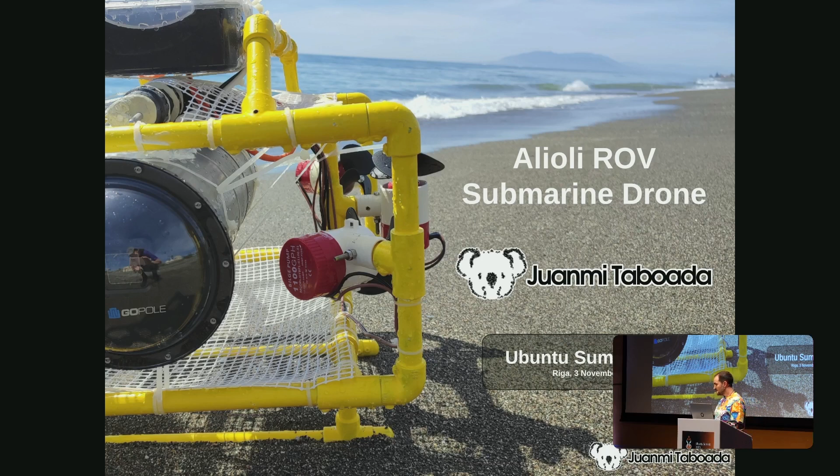This is the main thing that brought me to make the submarine. I am a scuba diver. I actually have the license for deep diving, 40 meters. What moves me to make this project is the passion for water, to be able to share what I like so much about what's going on under the water, with people that I love and my friends.

There are people that can enter the water, but there are others that cannot, because of conditions or whatever. The first thing that happens when you get to the water the first time is that you don't know anything about it. You've been swimming on the surface, but you don't know what's going on underneath - it's a totally different thing.

The first feeling when you start breathing underwater is like you can stay there as long as you want, but usually not longer than 45 minutes, up to 90 minutes, maybe 2 hours. That shocked me in the beginning, because it takes so long to prepare everything - the equipment, the course, the knowledge - just for 45 or 90 minutes. So you have to make that time worth it.

When you go to dive the first time, you need a license, and there are several licenses. The most common is PADI certification - the open water diver is the first certification, and it gives you access to the first 18 meters. With a bottle you rent, you can get under the water down to 18 meters, covered by your insurance, because if you do it by yourself, everything that happens will be on you. Then there's advanced diver at 30 meters, and finally deep diver.

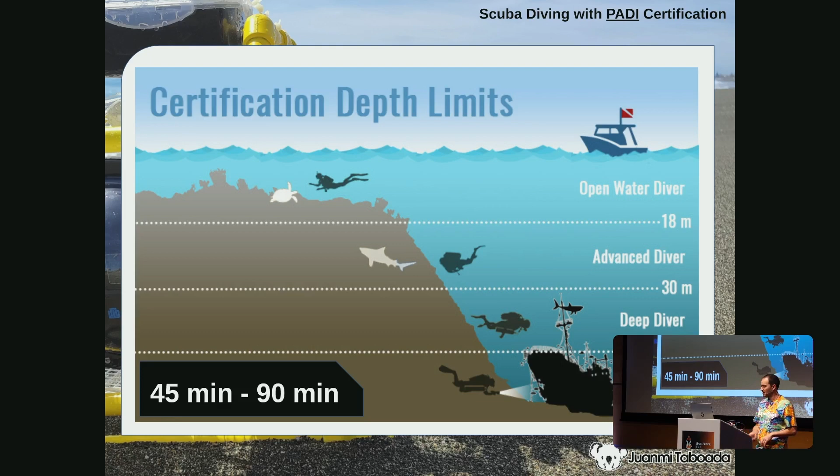If you make your own one, you can avoid all the preparation you'd need. You just take your submarine, like a drone that flies - you plug everything in, connect it to the computer, put it in the water, and it's done. If something happens, it happens to the drone, not to you. You just pull it back and repair whatever happens.

So to make that time worth it, you better make a plan. It's like going somewhere - what you see on the surface of the water is just a reflection of the sky, everything blue on top. But underwater it's like being on a mountain, with rocks, hills, and caves. So when you go underwater, you have to know what you're going to see, because you can face the problem of getting disoriented.

You lose orientation very quickly - you don't get used to it. We learn to get oriented underwater, but on the first dives, especially when diving somewhere for the first time, I need somebody to instruct me about that place, how the geography is going to be underwater.

Another thing that makes a plan important is that you have to predict your air. You have air in the bottle, and that has to last until you're out - actually you always have to live with a reserve. So to manage that air, you have to make a good plan. If you go too deep, you consume that air very quickly.

You have to be prepared for that. Maybe you go too deep, and when you're coming back, you have to stop. You cannot just go straight out of the water. You have to stay at some depth, until 5 meters, 3 meters, and wait 2 minutes before leaving. It's a very short distance, but the difference of pressure is quite big.

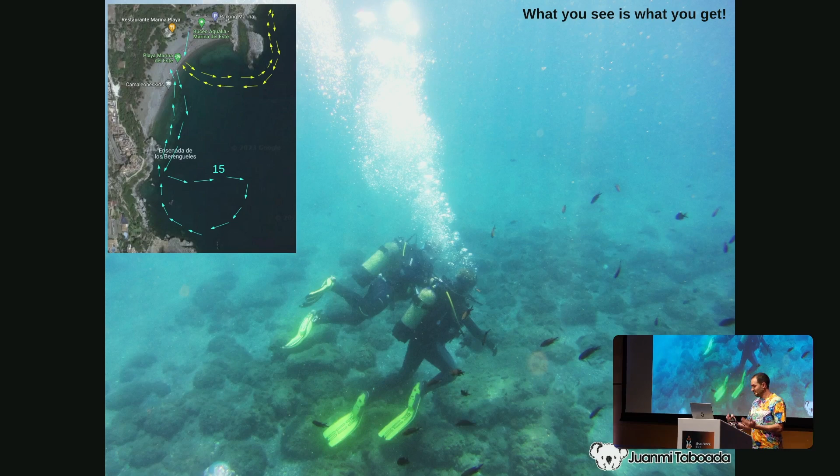So somebody has to tell you about it. Sometimes it's just blue, everything blue. You might be at 15 meters, with another 15 meters down or up, and you don't see any reference. So you only have your compass and the depth of that dive in that moment.

Another thing that I needed for building my own submarine is to have passion for computers and open source. This is actually a cluster based on OpenMosix, which was open source in 2001 when I was studying at university. That was one of my first projects, making a computational cluster based on OpenMosix. One developer of OpenMosix is from Málaga, so I could talk with him about it. That was what sparked my knowledge and my need for learning about open source and everything.

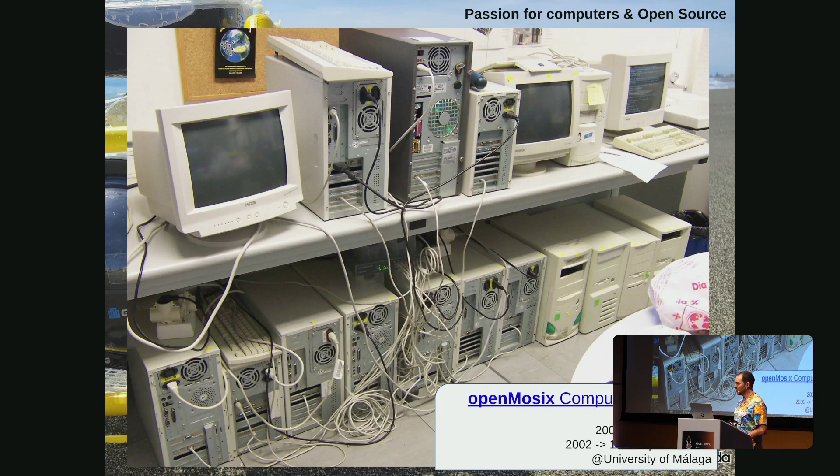Another thing you need for making a submarine is passion for researching and learning. It's not enough to start building with the knowledge that you have. You will have to research, read, ask, go to forums, and sometimes you just have to keep pushing and working, thinking about why something doesn't work. I remember one specific moment in the project that almost made me drop it because nobody could help me. So you have to be open to that researching, and especially to learning.

So this is what is going on now. What is the main concept of the project I'm working on? My main idea is to build a 3D map of the underwater areas near the coast. I'm not interested in going deeper or farther from the coast - the reason is because it's for scuba divers. A scuba diver who wants to dive in some place should be able to get a map with enough information and detail to know what's going on, where that person can go or dive, and what they will find.

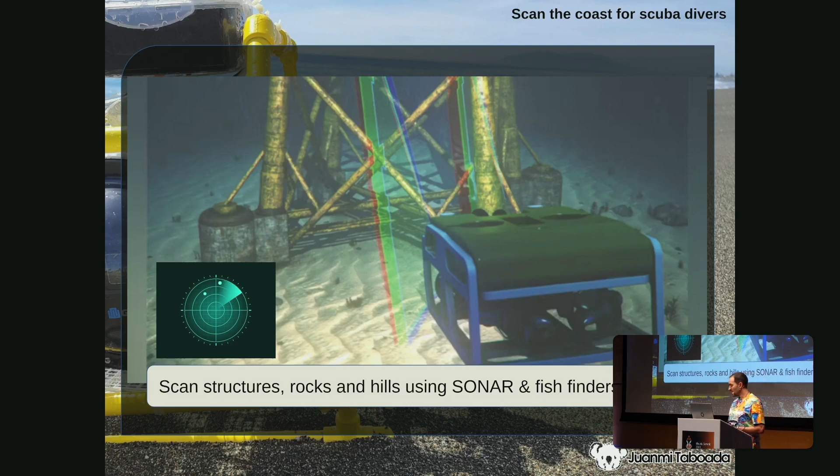My first approach was to find something that could scan structures, rocks, and hills. I thought, okay, it could be a sonar. Then I saw that sonar needs a lot of energy, so I decided to go with fish finders. Fish finders are quite a good solution, but they gave me results like this - a cloud of points that you then have to merge, and you don't even have the texture of the sea. So it was very difficult to process, and it needed a big amount of electricity.

So it didn't meet one of my approaches, which was that I wanted something that didn't consume much. I was trying to work with microcontrollers only, no computers, without putting electricity in from outside - only working with batteries.

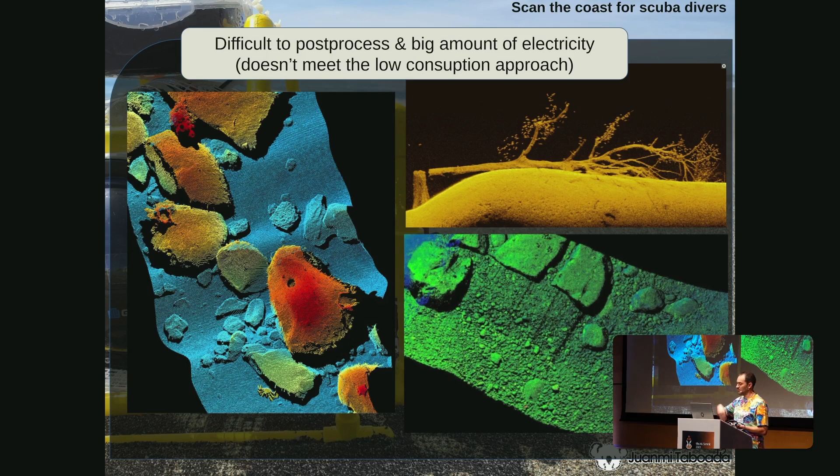So I found Meshroom. Meshroom is a framework, a software for 3D reconstruction based on photos. You take enough photos of something, and it will help you rebuild a 3D model of the object you are scanning. That was a good idea for me because I didn't need much to make my project work - I just needed a camera recording the dive and my ROV doing the paths. So Meshroom was a great decision.

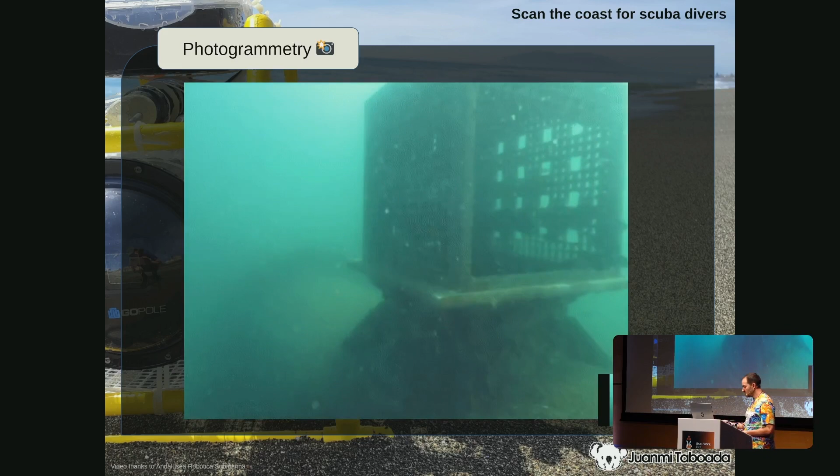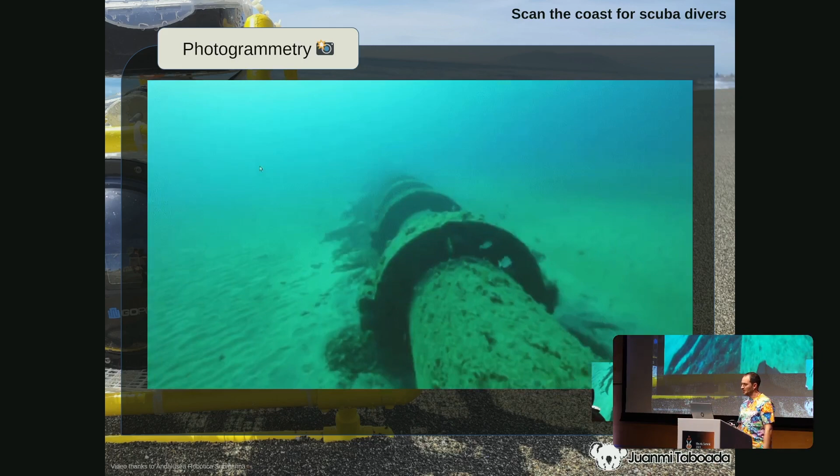This is another video, also from him. This is a pipe where residual water, after being processed, is pushed to the sea. So here we are scanning the pipe, to see if it's broken or leaking. For example, you can see that along the sides there are algae.

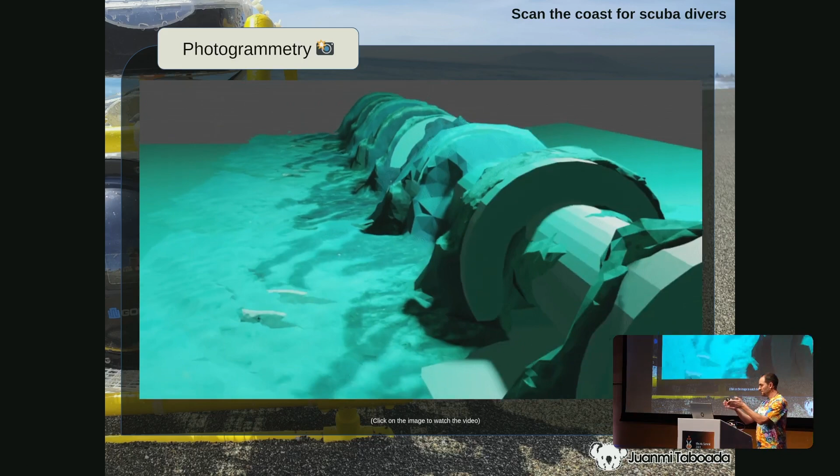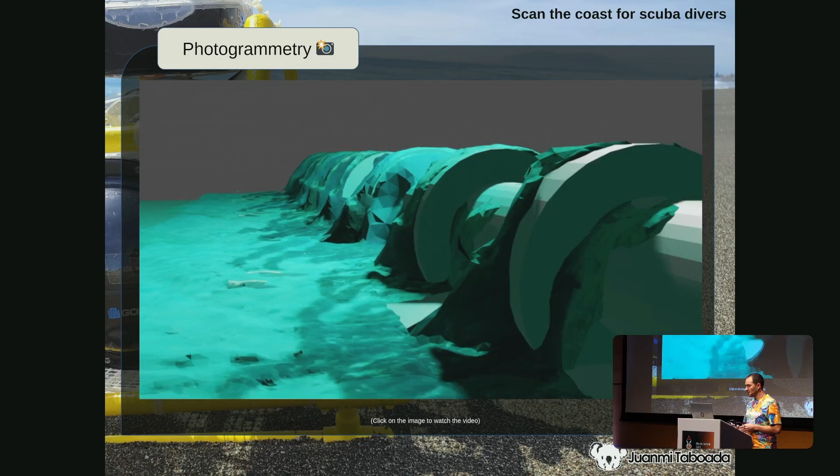So based on the video and using Meshroom, I got to this. This is a reconstruction that I made myself. You can see the algae on the sides as well, and there's a little bit of texture. I had to add a bit of my own reconstruction to keep the proportions and the shape, but it gives an idea of how it works.

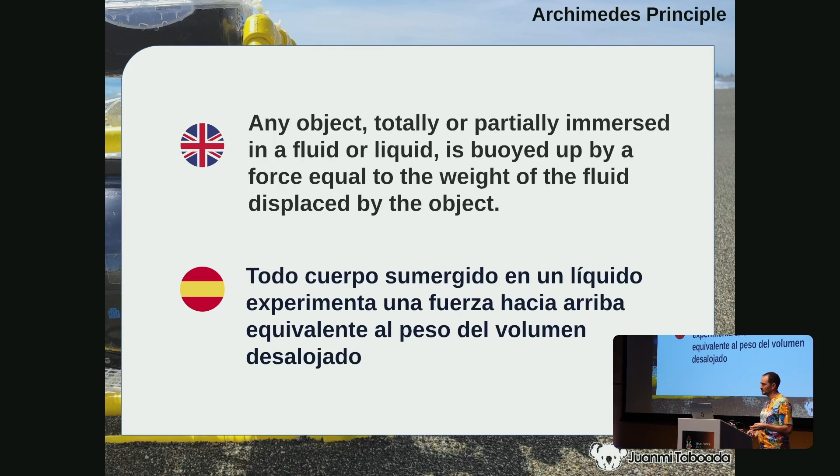Okay, let's talk a little bit of theory. First thing you need to know when underwater is the Archimedes law. The Archimedes law says that any object totally or partially immersed in a fluid is buoyed up by a force equal to the weight of the fluid displaced by that object. Okay, but what does it mean?

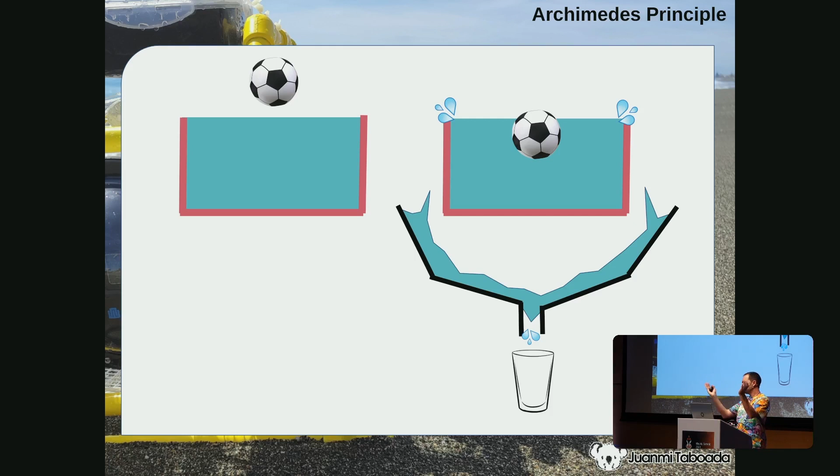Imagine we have this football and we are pushing it under the water. When we push it under the water, it is, of course, flowing out and going up. Let's imagine we collect all this displaced water inside a container. We have it here, we get its weight, we measure it, so we know the weight of that water that went out. That ball is being pushed up by the same force.

What does that mean? If you push it too deep, it will displace a lot of water, so the force from underneath will be too strong, and the ball will go up. When the system is stable, displacing exactly the same water as the mass of that object, then it's neutral - it stays in a stable situation. This other case is when the mass of the object is really small, but the force is strong, so the object is pushed up.

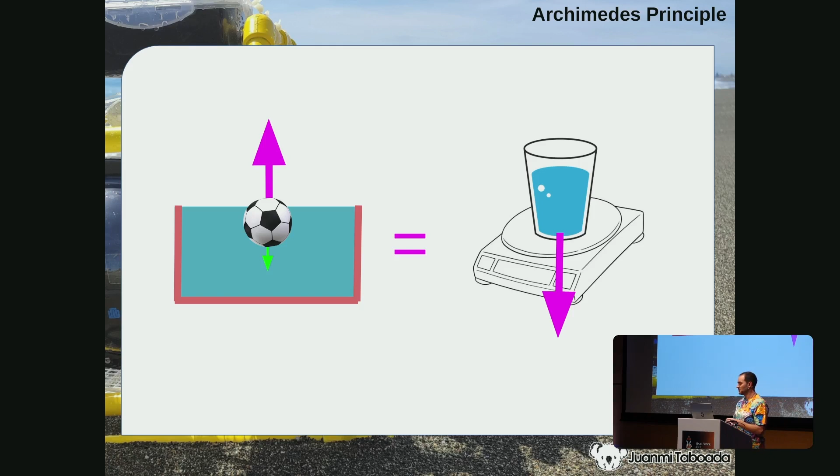What if we make an iron ball? The mass is bigger than the water it can displace at the same volume, so it will sink. The force is pushing up, but it's not enough - the mass will push it down.

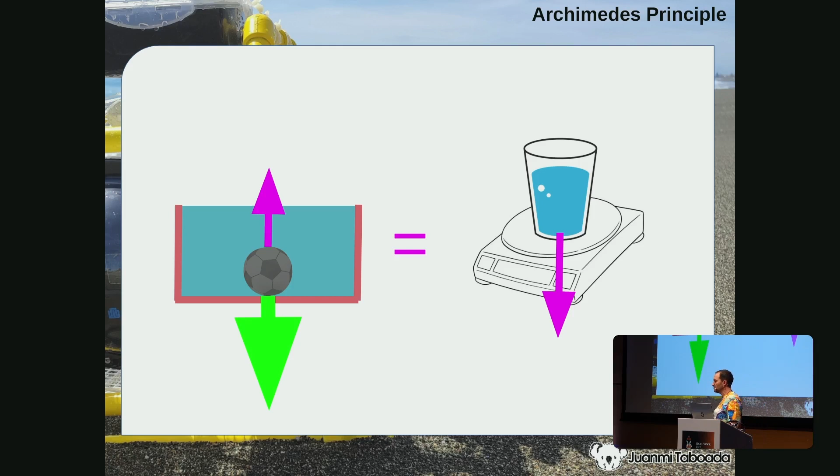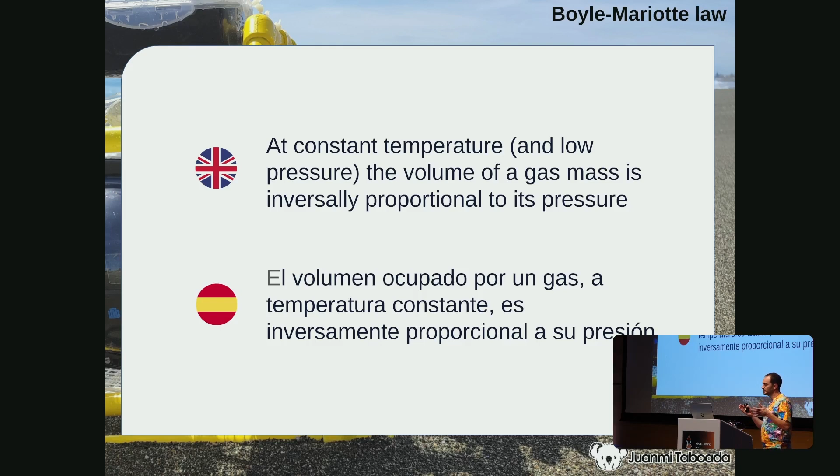But there is another law, the Boyle-Mariotte law, which says that at constant temperature, the volume of a gas mass is inversely proportional to its pressure. Again, what does that mean? We have a volume of 60 liters at half an atmosphere. If we compress it to half, we reduce the volume from 60 to 30, and what happens with the pressure is it doubles - we move from half an atmosphere to 1 atmosphere.

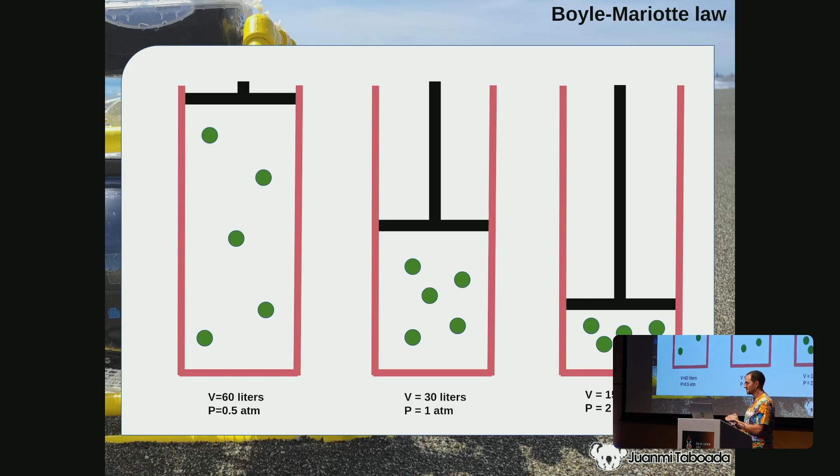What happens if we do the same again? We compress it and divide the volume from 30 liters to 15 liters. The pressure will double again, to 2 atmospheres. So let's see all of this together - if we put these two laws together...

We have an object we want to put into the water, a submarine, and we want it to go down or up. When it's at the top of the water, at the beginning, not deep, the volume of the object is the size of the submarine, and there is a force pushing it up. At some point it will be measured so the submarine stays at a specific depth, stable - displacing the same amount of water as its weight.

What can happen is if we go deep, many meters down, the submarine itself will compress. If it compresses, it displaces less water, and the buoyancy force becomes smaller. So at some point it was stable at the top of the water, but as we went down it compressed, we lost buoyancy, and it probably won't be able to come back up.

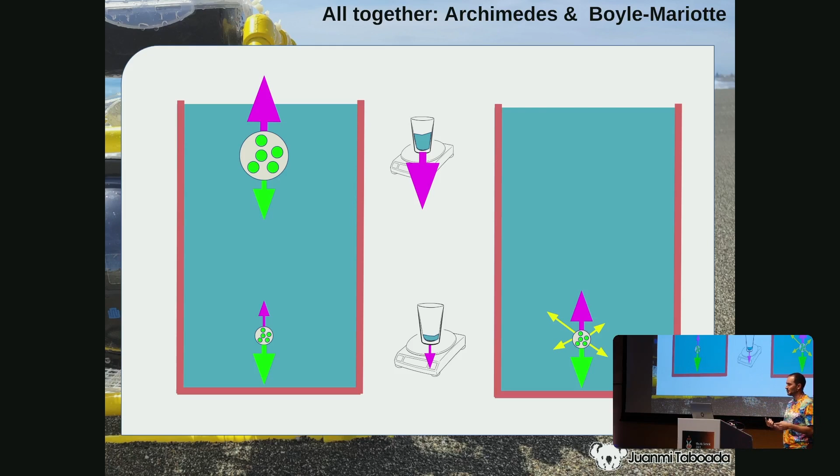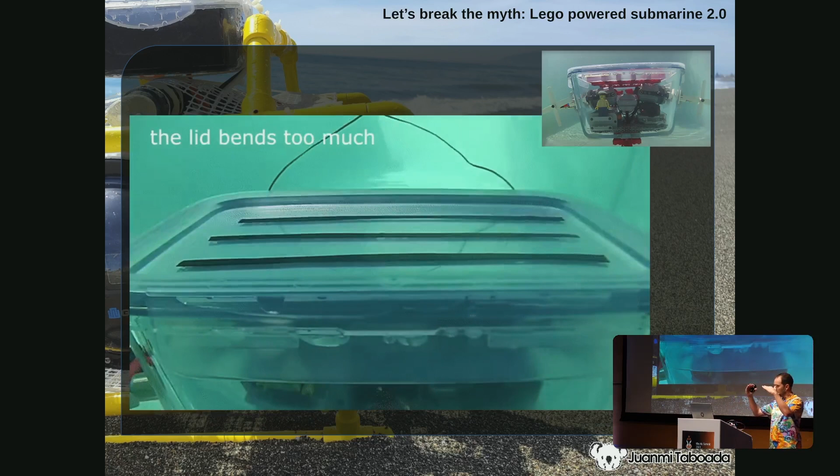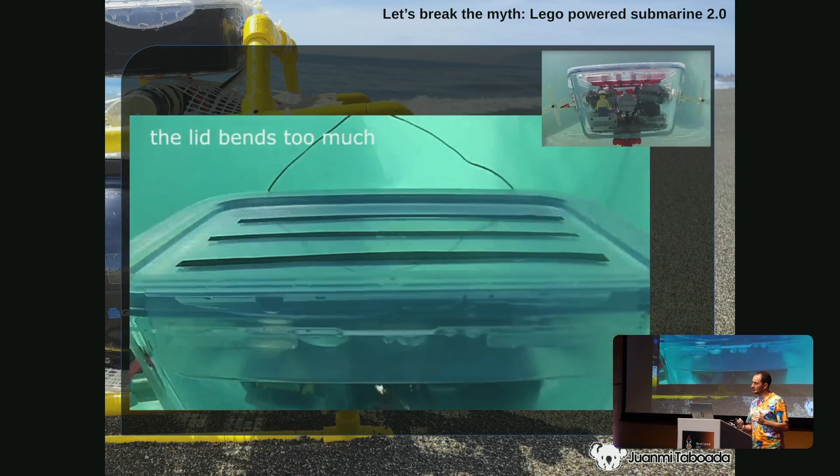This is what happens in the Lego Submarine 2, version 2. When they made it, you see the surface - this is just a little bit, but enough to make the submarine not able to come back. So that was the first problem that they had. Of course, the next version resolved it, giving more consistency to the submarine, making the cap not to bend. But still, if you move it to 5 meters, it will, because it shouldn't be that flexible.

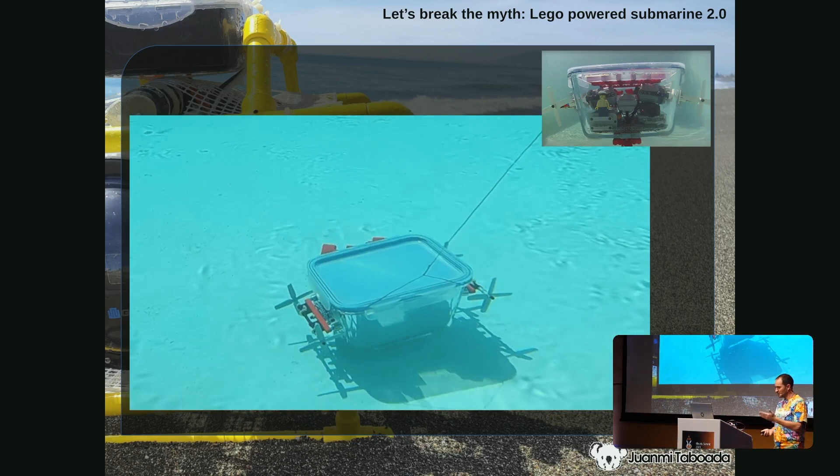There is another approach on Lego Submarine version 4, which is using a syringe, putting water in and out of the submarine. The idea is very good because it works very well in the first meters of water. But if you go quite deep, the engine of that syringe won't be able to move the water out - it will just stay in, and the submarine won't be able to come back either. So this is something you have to be prepared for when taking a submarine many meters down. I'm talking maybe, if you go to 4,000 meters, they can compress even the structure.

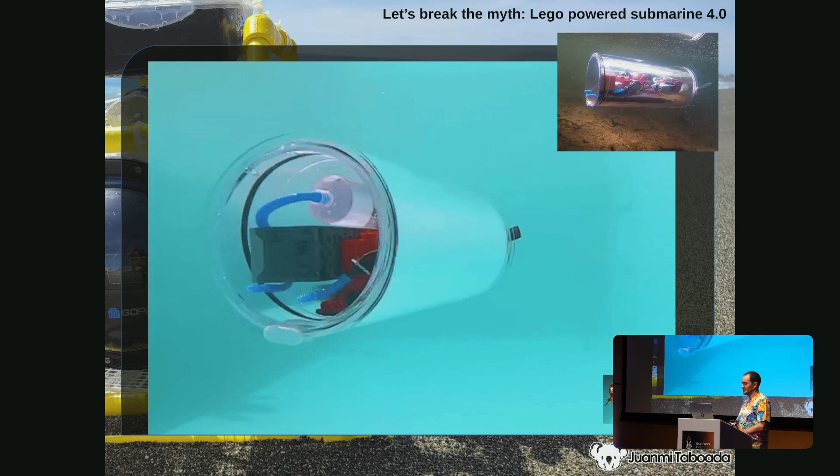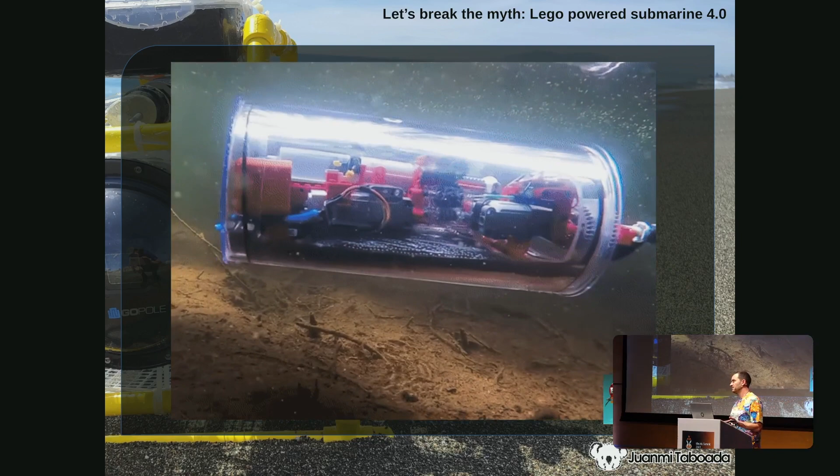This is what you see - it works, but it works only in the first layer of water. I'm trying to make a submarine that is going to dive in the first 20 meters, maybe. Why the first 20 meters? Because the light of the sun doesn't get too deep. So most of the life that is happening next to the coast, most of the interesting things when you are diving, are happening in the first 20 meters. Usually after 20, 30 meters, you just find sand.

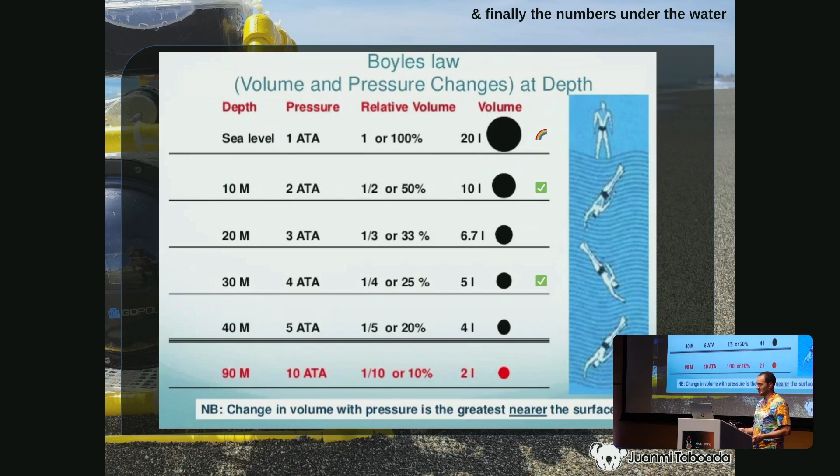This is actually our point - I want to make a submarine that is going to dive there, so I had to take this into account quite strongly. So with this, we are all set. And this is what I was trying to make.

A fully digital control and telemetry submarine that can be controlled and get telemetry from it in a digital way. I didn't want anything analogic. The two submarines that you saw before are analogic - they have radio control and send signals through the remote control.

What else? I wanted to make it with microcontrollers. I wanted to learn from it, and I wanted to make the submarine last as long as possible. So I didn't want to use computers, no Raspberry Pi, no small computers - I didn't want to deal with heat either. So I based the submarine on microcontrollers.

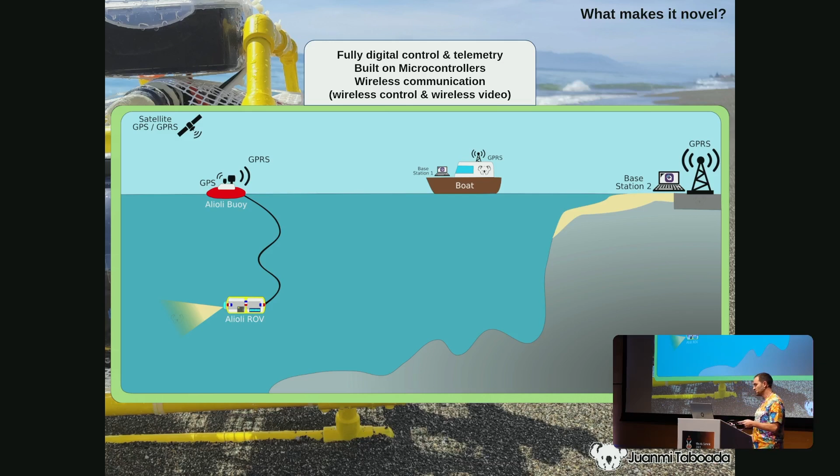What else? Wireless control and wireless video - so I managed to get both. I wanted to make a submarine that more people could build, something I could share with all of you, so you would be able to build it with the tools and things you have at home, or at least at hand. So I started using PVC pipes - they're easy, they're cheap, and you're able to cut them.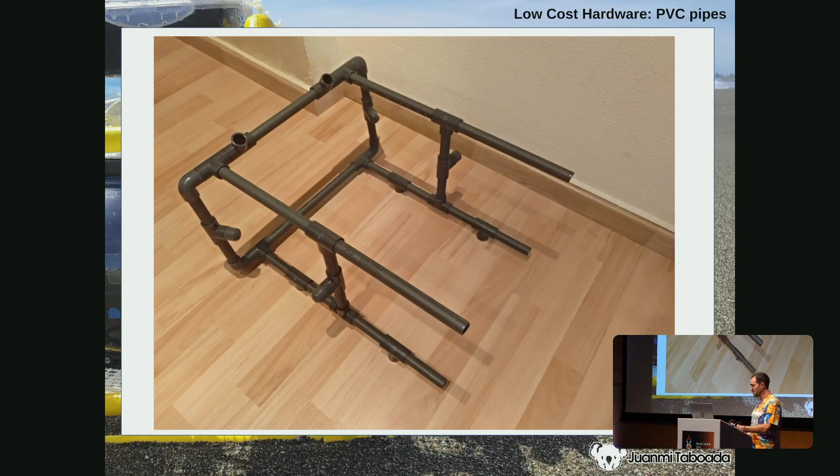Also, I decided to go with low-cost hardware. My first Arduino kit. I knew electricity because of the university, but I didn't have a deep knowledge, I never had the chance to practice with it. So I bought my Arduino kit and said, okay, this is done, it's gonna be so easy. There are so many experiments, it has to be quite simple to make a submarine with this.

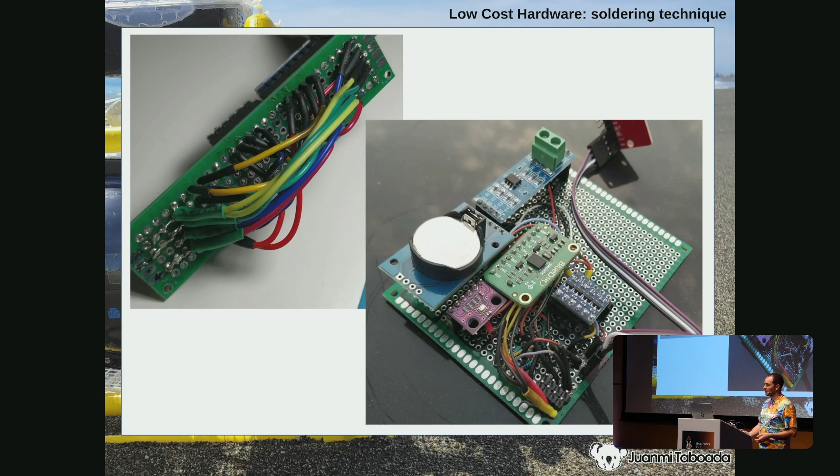I went first with Arduino Mega. I thought that would be enough, and it was. The submarine itself has an Arduino Mega inside, and it's managing everything. For the buoy, I started with Arduino Mega too, but I started having problems with the memory. So I moved to ESP32.

I said, okay, that's going to be a great choice. And again, I had problems with memory. I had problems with the stack and the RAM, they were mismatching one with the other and giving me problems. So Raspberry Pi Pico gave me all the solutions. So the buoy has a Raspberry Pi Pico on the top line, and we have Arduino Mega underwater and Raspberry Pi Pico on top.

Why did I have RAM problems? Because I needed to put into the buoy a library named Mavlink, a communication protocol used to talk with the submarine. The problem I was having with it is that even if I reduced the number of commands I was using, and the commands the submarine was accepting, it still wasn't enough.

So I moved the reception of the commands from the Arduino Mega that was under the ROV, because for me the buoy was a gateway, and I had to move it to the top line. So all the logic now happens on the top line. The Mavlink protocol is processed on the top line in the buoy, and the buoy sends very simple commands in binary format to the submarine, and the submarine responds the same way.

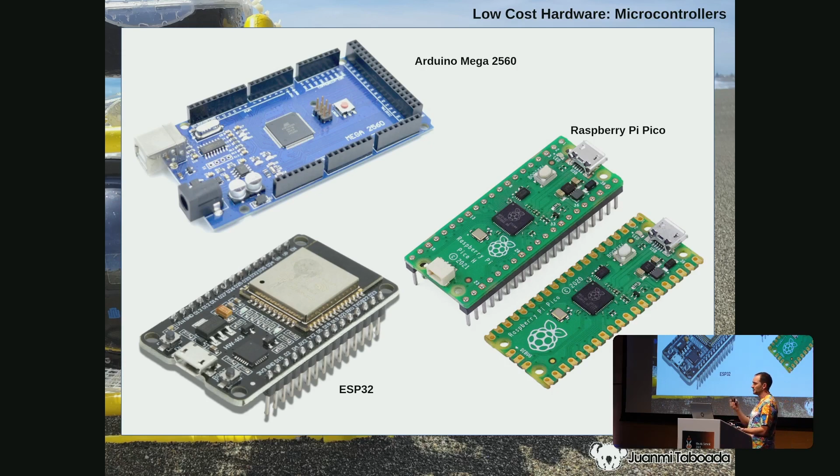For example, I had a GSM GPRS module, and when I was plugging it into the power supply at home, it was starting and working perfectly. But when I was using batteries, like drone batteries, that can give a lot of energy in just a second, it was shutting down. It was sucking all the electricity from the circuit. Even using a diode, using capacitors, it wasn't enough.

Then somebody came and told me to look at supercapacitors, and I started using them. I knew because I was using the oscilloscope, it was giving me enough information so I could see that spike and what's going on in the circuit. And I knew my Arduino was actually shutting down, because there's a limit of 3.3 volts.

But then OpenBench wasn't enough, and I met PulseView. PulseView is one of the best softwares that I have used. Both are open source, but PulseView is a great software for analyzing data with the oscilloscope.

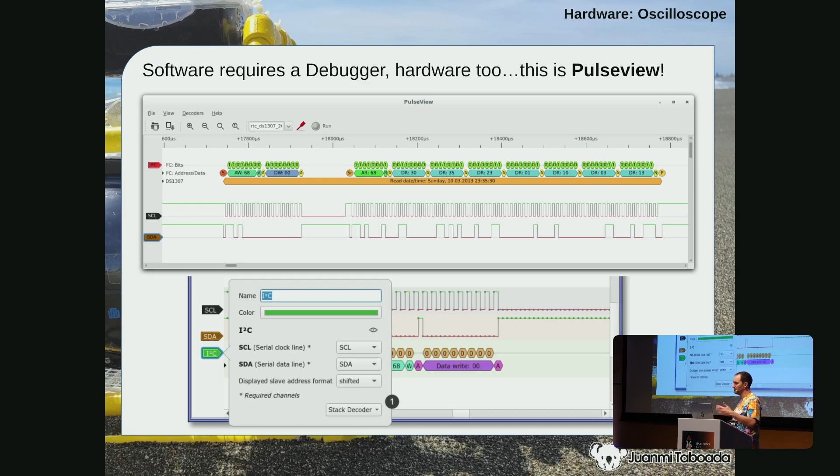Because you plug the sensor, you see the lines happening there, but you can tell PulseView, okay, this is an I2C protocol, and this line is this sensor, and this other line is the other sensor. And it decomposes, it decodes the protocol itself. So this helped me find out some noise in one line that was interfering with another component, which helped me resolve it. That was actually with telemetry. It was working most of the time, but in a specific condition, it wasn't.

A digital submarine has a lot of data, because everything is digital. I'm an engineer, so I can dump all this information back to the cloud, process it, save it, and do stuff with it, like get the graphs.

Why do I use Mavlink on the top line of the water on the buoy? Why push myself to use Mavlink? Because I met QGroundControl, thanks to a friend who gave me the possibility to pilot a professional submarine. I saw he was using this software, and it's free, open source as well.

So I went through the protocol of Mavlink. Mavlink was providing telemetry, reading the communication, the controls, the commands. So I could tell the submarine what to do using Mavlink, and the submarine would answer with the telemetry. And what about the video?

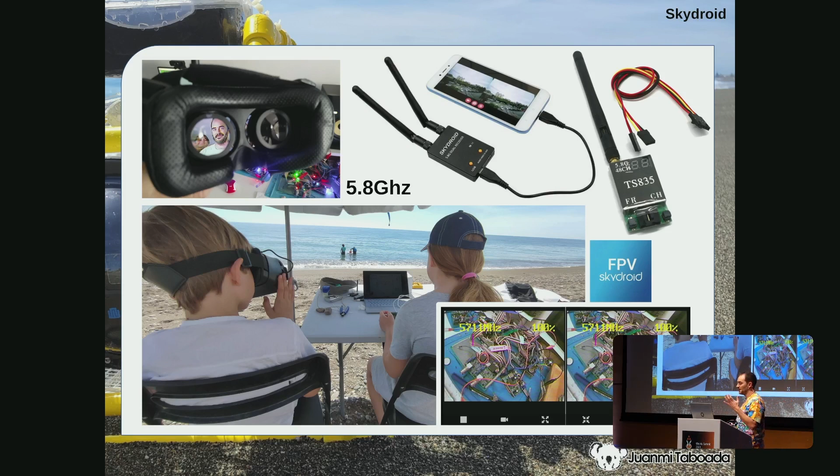So I put the video signal from the drone camera, which is on Alioli, a drone camera from the air, under the water. I'm putting this signal back to this chip, and it's being sent wirelessly to the device, my computer or through the phone, or both at the same time.

This is a Micro MinimOSD. This is under the water, inside the ROV, and it's a chip giving the OSD information. Why? If I had the telemetry, the data logger, and QGroundControl showing me the telemetry, why did I decide to add an OSD also?

Because I didn't want to deal with the lag of the network. I wanted fresh images, and I'm the one driving, so I need to know what's going on in the submarine at the right moment. Submarines with a cable are very reactive, you move it and see the reaction on the program. But since I was using GPRS and all the protocol and microcontrollers, there was a bit of delay.

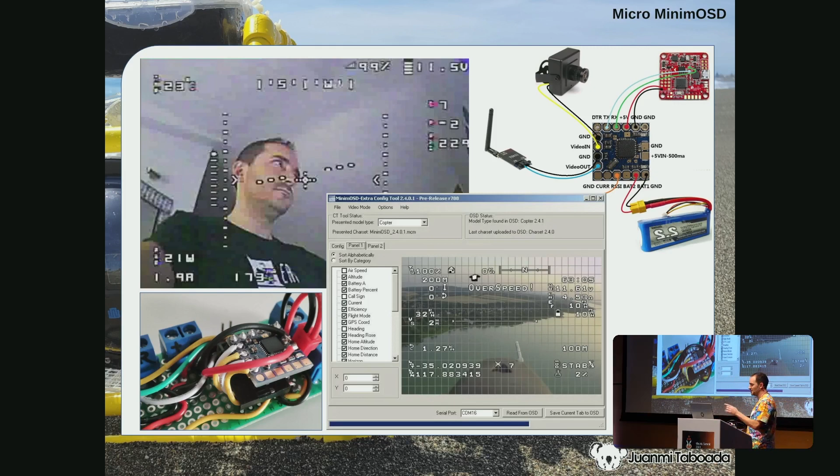So I decided to avoid it by introducing this OSD board, which you can program and decide what to show, like the voltage, the battery, and things like that. What's nice is that it works with Mavlink as well. So I killed two birds with one stone because I resolved the telemetry with QGroundControl, but the MinimOSD was also reading the same protocol, so it was almost straightforward.

One thing I learned from this project, and will apply in the next version, is divide and conquer. I missed it while building the ROV. I wanted to make it with Arduino in the beginning and later with the Raspberry Pi Pico. But Mavlink is a protocol that works like in a car, in units, so it's easier to have a little module for the engines, a little module for telemetry, all sharing the same bus.

So I could handle each of them using just the same bus, and it would be easier. I wouldn't have so many problems with RAM. So that will be in the next version.

And there's also a torpedo, a different project based on the same things, with an approach like Fast and Furious. It's a submarine shaped like a kind of torpedo, made with ESP32 and MicroPython. The point is to give it a plan, and using GPS it's supposed to make a path on the water, so when I plug in the water analytics board, it can give me information about a big area of the sea.

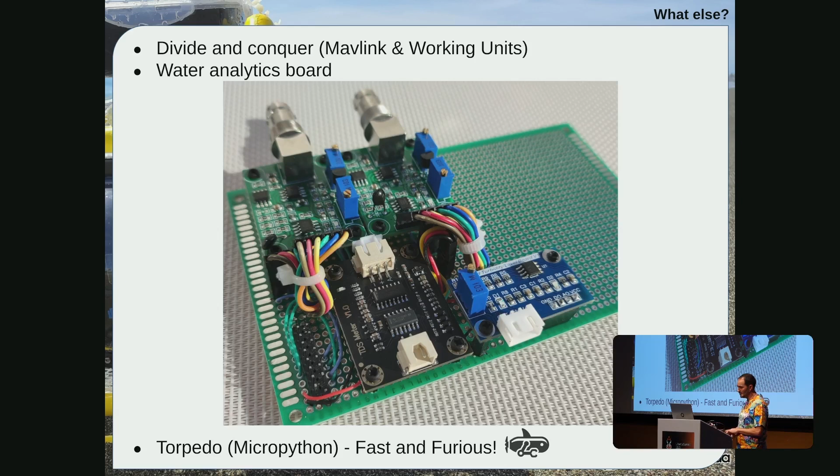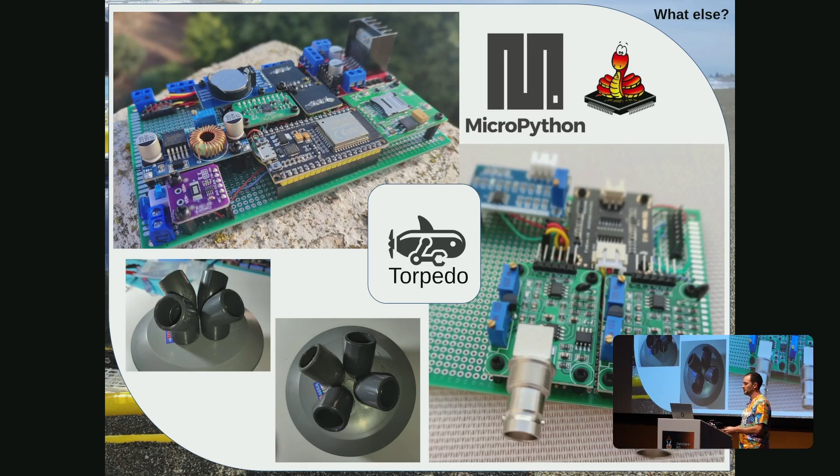And this is it. Also, I was researching about the propulsion system. Since the Alioli ROV is working with propellers, this one is working with an impulsion system, like a water motor that is pushing water outside, like maybe like a rocket.

What other usages can we give to the ROV? Underwater photography, we can use it for body searching, we can study invasive species. Actually, we have done this with professional submarines. There are some algae that are where they shouldn't be, so we can act on them. Especially, like I said in the beginning, for disabled people with underwater health conditions and diseases. I have a friend especially that cannot go under the water, and he would love to. So I can share that experience with my friend.

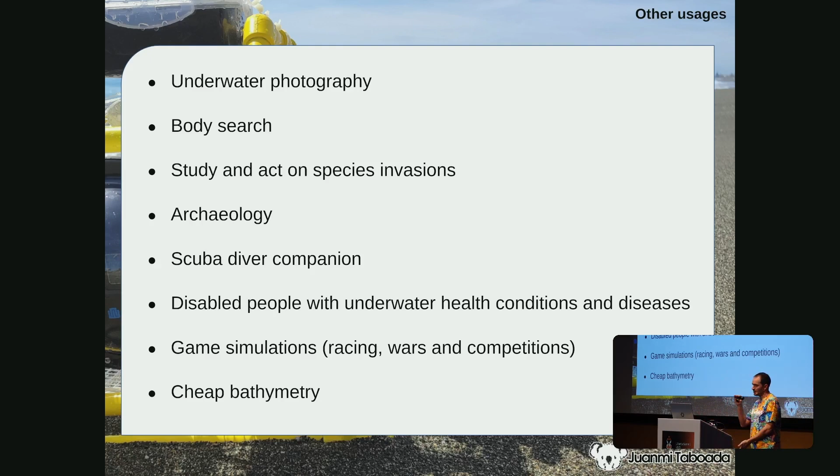Definitely game simulations, racing, wars, and competitions, all of that is open. And finally, cheap bathymetry. Bathymetry is the science of measuring the depth of a place, so there are maps of it. This is a very cheap way of making it.

But we are engineers, and it's never enough. This year, in spring, I was able to get my hands on a professional submarine, and I was able to open it. With the knowledge that I got during the development of Alioli ROV, I was able to discover the several components that they had. This is ArduSub, based on ArduPilot. I knew it before, and it works with Pixhawk. It's actually a great board. I decided not to use it in the very beginning because it was expensive, and it is expensive, in my opinion.

So I decided to go with Arduino because of the price, because I wanted to bring something that everybody could make in any part of the world. 160, 170 euros is maybe a big price in some parts. Still, what I learned is that with just a Raspberry Pi and Pixhawk, you can have a submarine. Of course, it's not that simple, you need many components, but many of the drones you are using in the air already work with it. So why not?

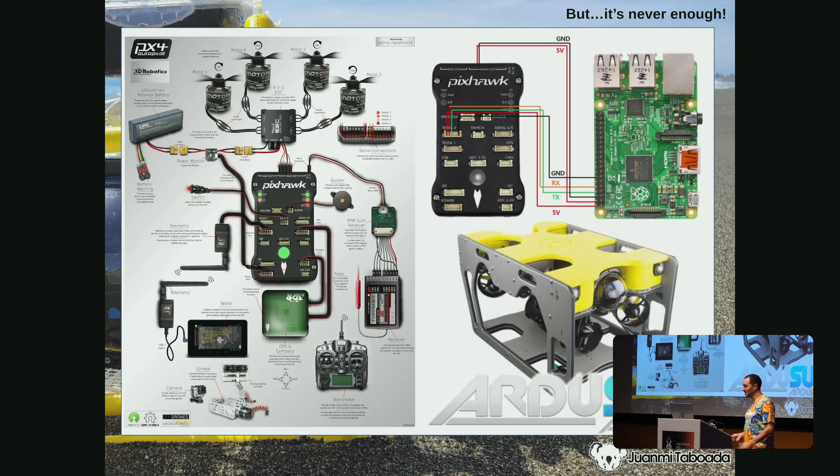And this is Alioli. That is so.

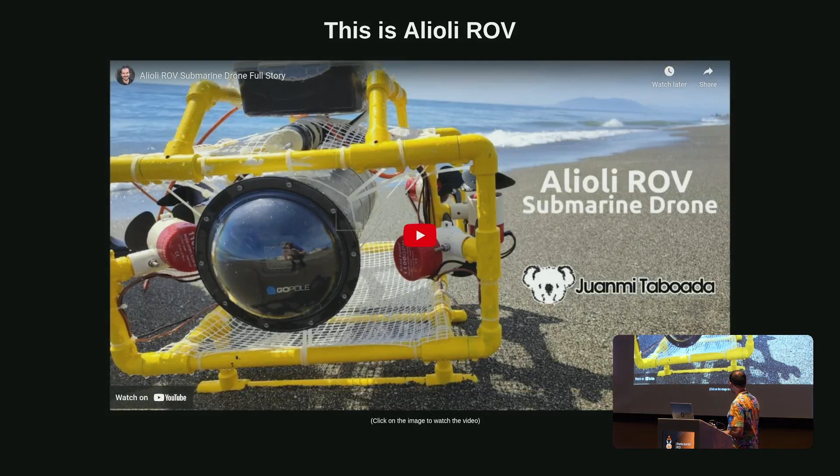So are you planning to add lights, because in most of the world the water is not so clear, and have you maybe done it already? It will be some lights. Actually, the submarine Alioli has two batteries: one drone battery inside and one external 12 volt battery, like the ones used in electrical bikes, so they have a little bigger one. So there are two batteries, and this one is providing the energy for the engines, the propellers, and for the lights. I will suggest you try to take the underwater flashlights from diving. Yeah, it could be a solution, like recording, put the camera with it. It's the same solution, it actually is the best approach.